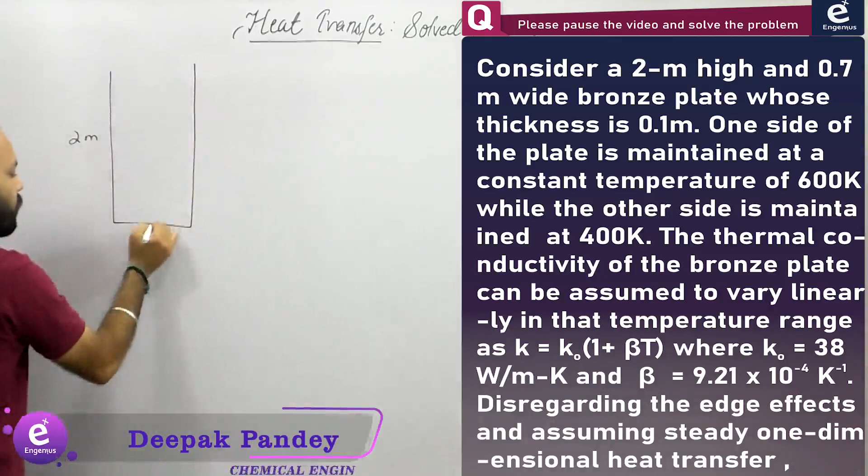पहला क्वेश्चन देखते हैं. The question says consider a 2 meter high and a 0.7 meter wide. So this is 2 meter high and 0.7 meter wide bronze plate whose thickness is 0.1 meter. Actually this width is not in this direction. ये width जो होगी ये इस direction में है, तो that becomes 0.7 meter. Okay, having a thickness of 0.1 meter.

One side of the plate is maintained at a constant temperature of 600 Kelvin. So you can take any side. Suppose this side is maintained at a constant temperature of 600 Kelvin, while the other side is maintained at 400 Kelvin.

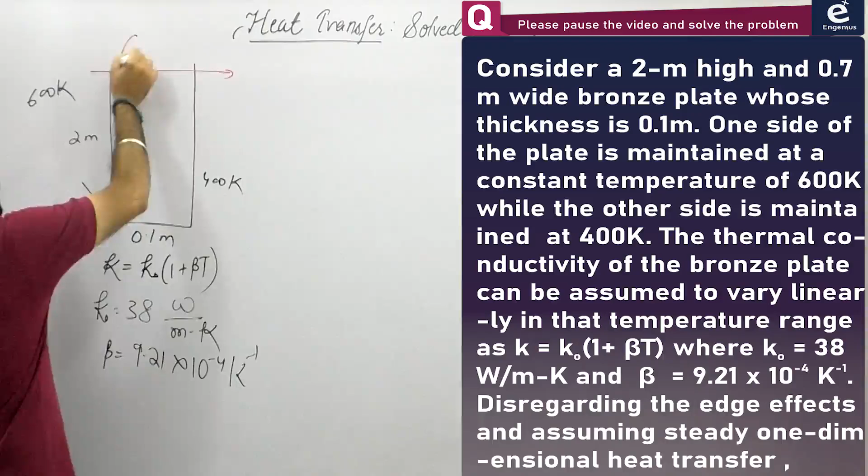Disregarding the edge effects and assuming steady state one dimensional heat transfer, determine the rate of heat conduction through the plate. So steady state है, one dimensional है. And please note that we have to find capital Q. Be very careful that in question आपको capital Q पता करना है या small q.

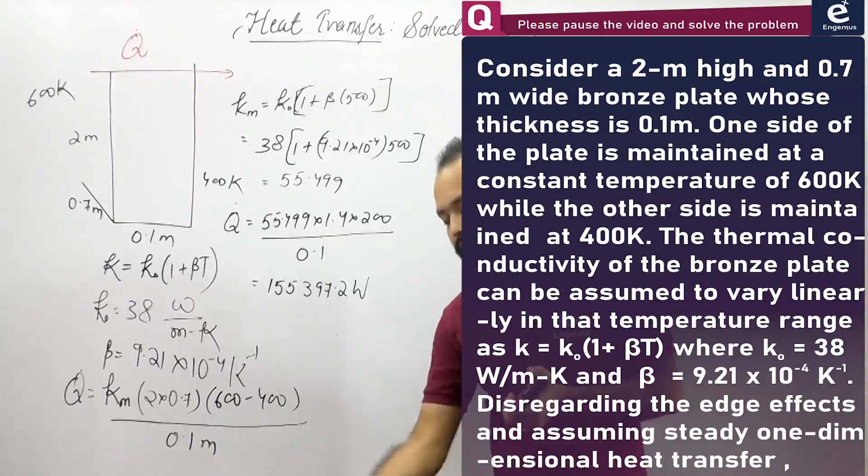In these kind of problems, I should be extra careful while solving these kind of problems, okay. So this was a simple numerical where k was thermal conductivity.

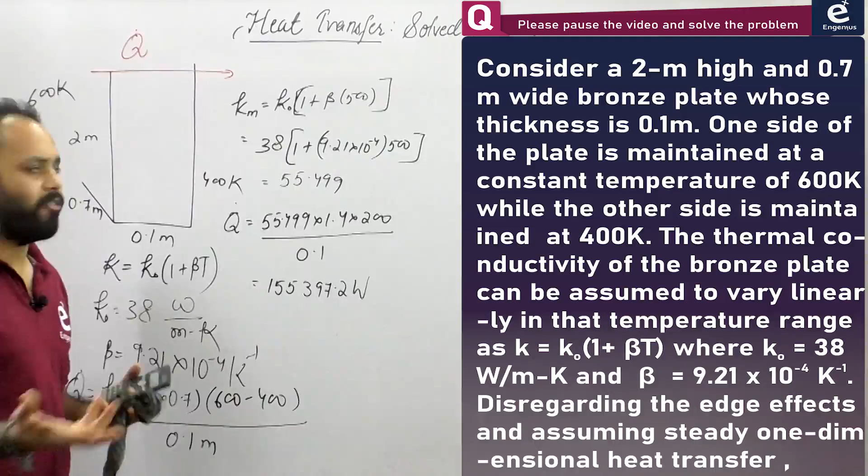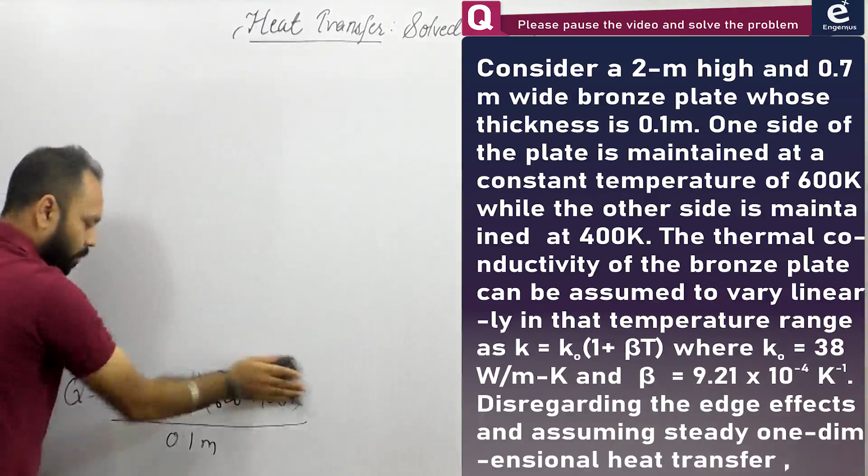Using 4 digits after the decimal during the calculation, fine. The final answer should be rounded off according to the statement of the problem.

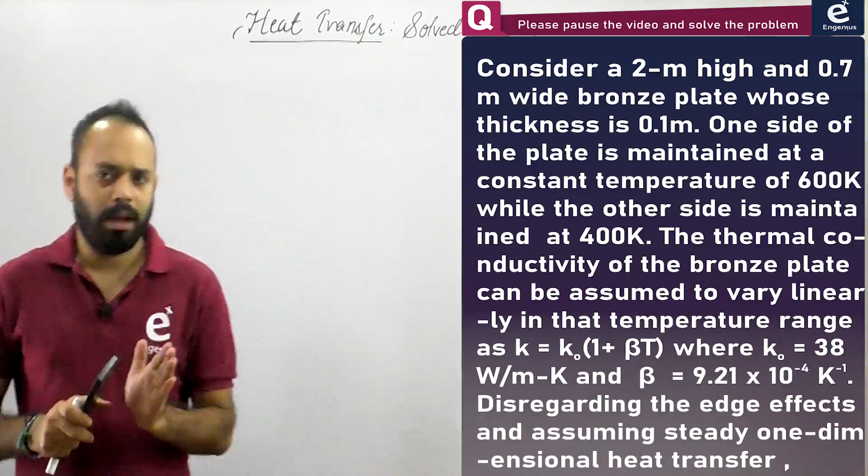So make a habit of using 4 digits after the decimal while doing your calculations, right? And the final answer should be rounded off according to the statement. Many times the statement says rounded off up to 2 decimal places, rounded off to nearest integer, rounded off to next higher integer.

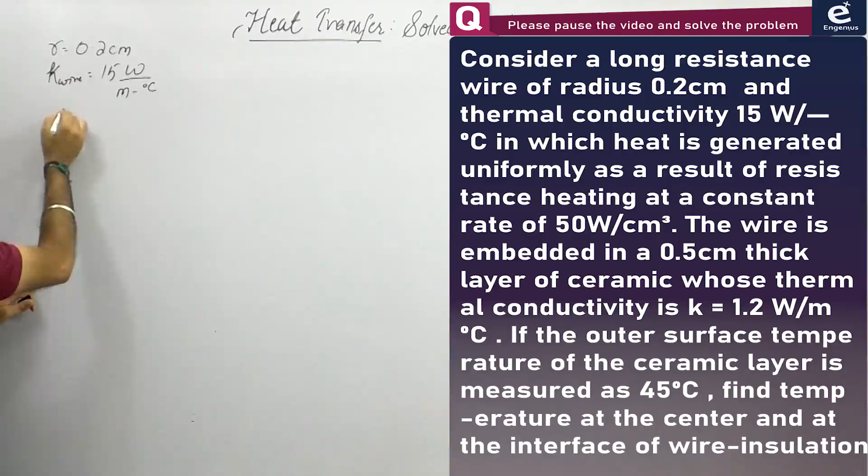There should be homogeneity in the units. Heat is generated uniformly as a result of resistance heating. I told you in current carrying conductors, heat is generated at a rate of, this is volumetric rate of heat generation. Different symbol has been used, but that won't make a difference. 50 watt per centimeter cube. Okay, the wire is embedded in a 0.5 centimeter thick layer. This is thickness, this is not the radius.

So this is the wire in which heat generation is taking place. This is the axis, suppose. The radius is 0.2 centimeter. After this wire, what is there? There is only insulation, there is cladding. Is heat generation happening in insulation? Of course not. In insulation there is no heat generation. Heat is only getting conducted in the insulation, correct?

The thickness is 0.5 centimeter, so the total radius becomes 0.7 centimeter. Ceramic layer, and the K of ceramic is 1.2 watt per meter per degree Celsius. Okay, the outer surface of this ceramic layer, this surface temperature is Ts, which is given as 45 degrees Celsius.

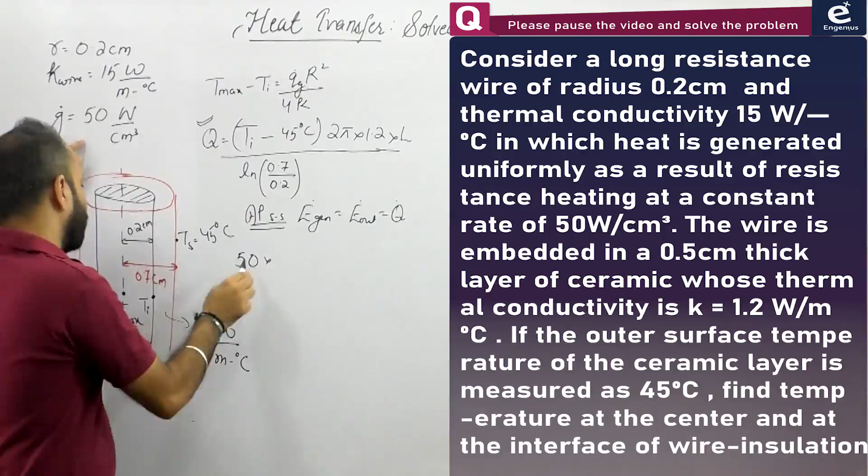What is heat generation? Don't say 50. 50 is the volumetric rate of heat generation. तो E generation क्या हो जाएगा? मैंने आपको कन्वर्ट करना सिखाया है. 50 watt per centimeter cube multiplied by pi. And what is R? R 0.7 लेंगे कि 0.2 लेंगे? It is 0.2 because जिस बॉडी में जनरेशन हो रही है उसका रेडियस केवल 0.2 है, 0.7 नहीं है. So 50 into pi into 0.2 square.

50 into pi r square into L. Are unit conversions required or not? This is watt per centimeter cube and this is L centimeter into 0.2 centimeter square. I don't think that unit conversions are required. So this will be 50. From here I can calculate the value of Ti. But what about the conversions? This L has to be in meter, because this 1.2 is in watt per meter per Kelvin. So this L is in meter.

If this L is in meter, even this L has to be in meters. अगर ऐसा नहीं करूंगा, then the units won't match, because later on when I equate these two things, this 50 into pi r square into L, I'll cancel out this L and this L. यहाँ यूनिट्स की कंफ्यूजन हो सकती है. आप बोलोगे कि सेंटीमीटर क्यूब, इट विल बी कैंसिल्ड. But in that case, if this L is in centimeter, I can't cancel out this L with this L because this 1.2 is in watt per meter per Kelvin, that is per meter per degree Celsius. So meter is there.

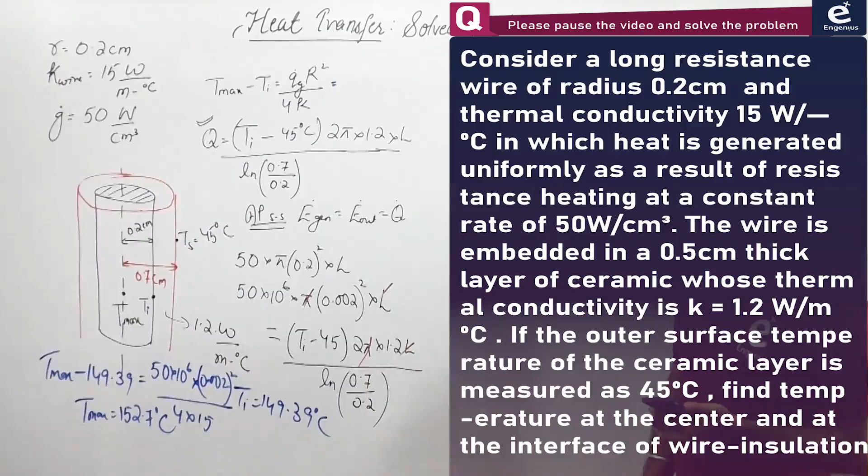The reason being that please understand that when generation is taking place, I can never write that Q is equal to driving force by resistance. So you can see that I have only written Q is equal to driving force by resistance only for this cladding, only for the insulation, not for the other portion. Also, you should understand that if Q is not given, don't say Q leaving from here, because Q here and Q here is not same. ये भी एक फंडा है यहाँ पे.

I told you that when generation is taking place, Q is a function of location. So Q here and Q here will be different. But Q here and thereafter Q everywhere will be same. ये fundamental है. अगर ये fundamental clear है तो आप generation plus conduction की problem में गलती नहीं करोगे. The problem can further be made complex by including convection, by including the medium here. So that was a very nice problem on conduction plus heat generation. I hope you were able to understand.

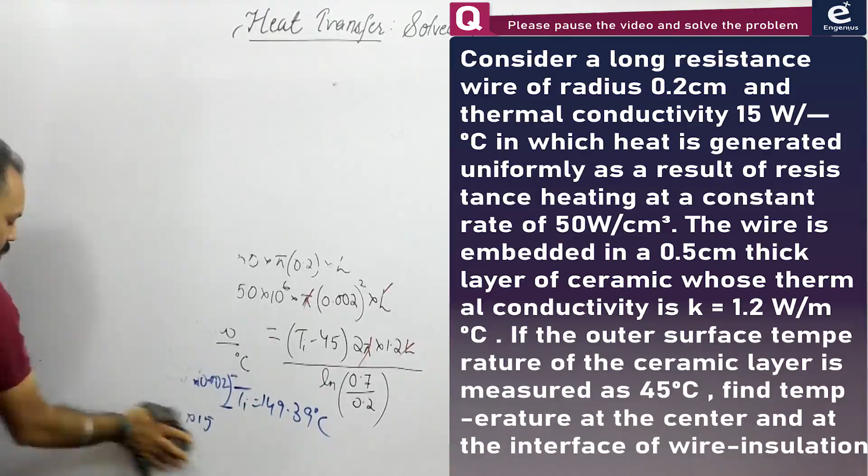Okay, let us take the next problem now. These two problems are not from GATE. I have also selected some problems from GATE, some nice problems, so that I can cover each and every detail. Whatever detail I have discussed in class, everything must be covered.

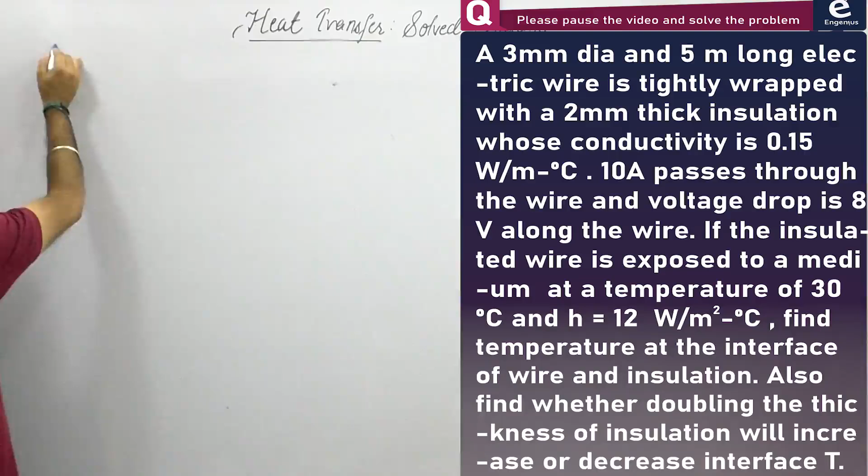Okay, so let us talk about the third problem. It says this was the resistance wire. A 3 millimeter diameter and 5 meter. See, this is diameter. So D is equal to 3 mm and length is equal to 5 meter. And 5 meter long resistance wire is tightly wrapped with a 2 millimeter thick plastic. Thickness is given to you.

Okay, so again there is a wire. What is the diameter of this wire? 3 mm means the radius will be 1.5 mm. So jab bhi aapko diameter aur radius ki baat lage, aap turant pehle confirm karke likh liya karo that it is radius or it is diameter, otherwise you will make mistake.

And 5 meter long is tightly wrapped with a 2 mm thick plastic cover. So 2 mm thick, so there is an insulation here. Okay, so let us make the insulation. What is the thickness of the insulation? Don't say radius, the thickness is given to you. It is 2 mm, right?

Electrical plastic, okay, 2 mm means this entire will be 3.5 mm. It is given that thermal conductivity of the insulation is 0.15. K of insulation is 0.15 watt per meter per degree Celsius. Theek hai? Electrical measurements indicate.

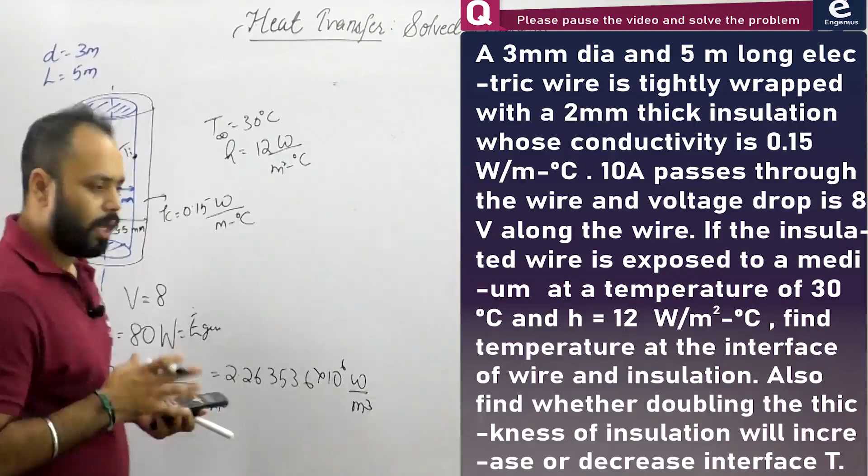So from the data of current and voltage, I calculated what is heat generated per unit volume and what is heat generated per unit time. Now the funda is that at steady state the heat conduction is equal. अब आप देखो, अब आपको यहाँ पे Tmax दिया है क्या? Even they are not asking you Tmax and they have not provided you Tmax. So why go into that equation that Tmax minus Ti is equal to Qg R square by 4k, है ना? Because Tmax ना तो पूछा है ना तो बताया.

In this case, they are asking Ti, right? So Ti, and this is your surface temperature. Let us call it Ts. Okay, let's see whether we can find the value without using the Tmax or not. Okay, so this is the 80 watt. 80 watt heat is being generated in the wire, and of course at steady state 80 watt will be leaving this. And if 80 watt is leaving, even in convection this 80 watt will be leaving. So can I say that everywhere this 80 watt will be leaving? So यहाँ के बाद in the insulation, in the medium, 80 watt will be the rate of heat transfer.

The units are fine, and therefore this must be equal to h, which is 12, multiplied by A. What is A? The surface area, which is 2 pi RL, or pi DL you can say. 2 pi RL लिख लेते हैं. 2 into pi into R, which will be 3.5 mm, so 3.5 into 10 power minus 3, into 5 meters. That is 2 pi RL multiplied by delta T. What is delta T? Ts minus 30. So from here you can determine Ts. Once you determine Ts, you know how to determine Ti, right? So let's do this calculation.

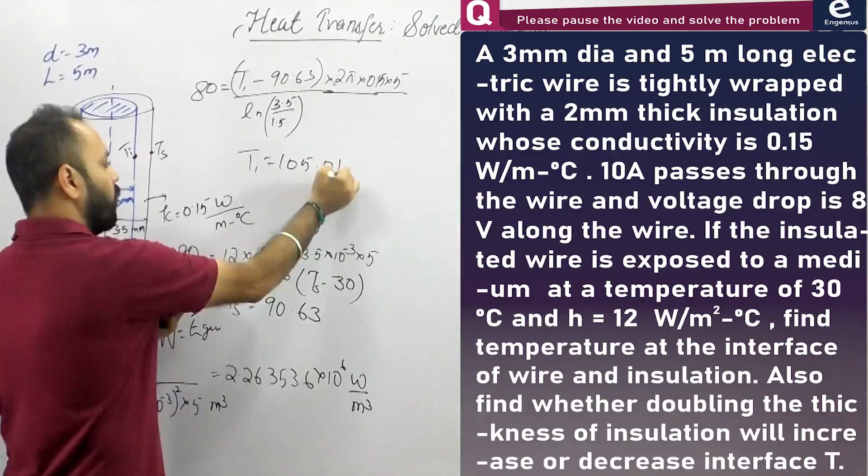So that 80 divided by this, मैं सभी को लेफ्ट हैंड साइड में ले रहा हूँ, और multiplied by log of this, find log of 3.5 divided by 1.5. Okay, this plus 90.63. The answer is 105. So Ti becomes 105. What was Ts? 90.63. So Ti is coming out to be 105.01 degrees Celsius. This is how you can do the calculation.

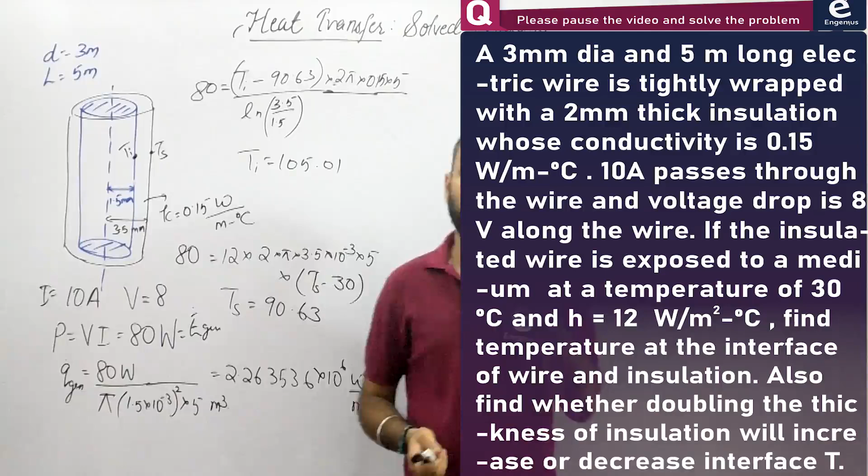Again, a very good problem on conduction plus convection. देखो, इससे पहले वाले क्वेश्चन में I tried to relate the cylinder where heat generation was taking place and the insulation. In this problem, I tried to relate the insulation and the medium. There can be a problem where T max is given and medium temperature is given, then they are asking things. Be very careful. Don't assume that Q at this position and this position will be same. Don't do this. These two problems will be a kind of eye opener for you.

Now the question says also determine whether doubling the thickness of the plastic cover will increase or decrease the interface temperature. इस thickness को बढ़ाने से आपका इंटरफेस का टेम्परेचर इंक्रीज होगा या डिक्रीज होगा.

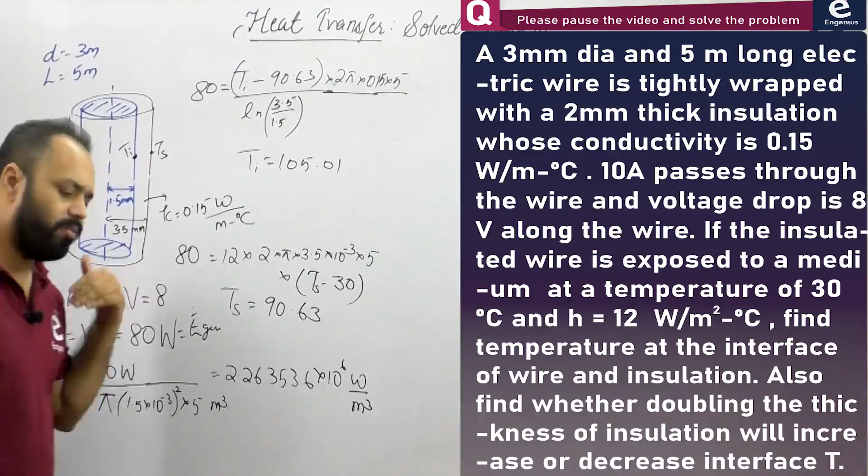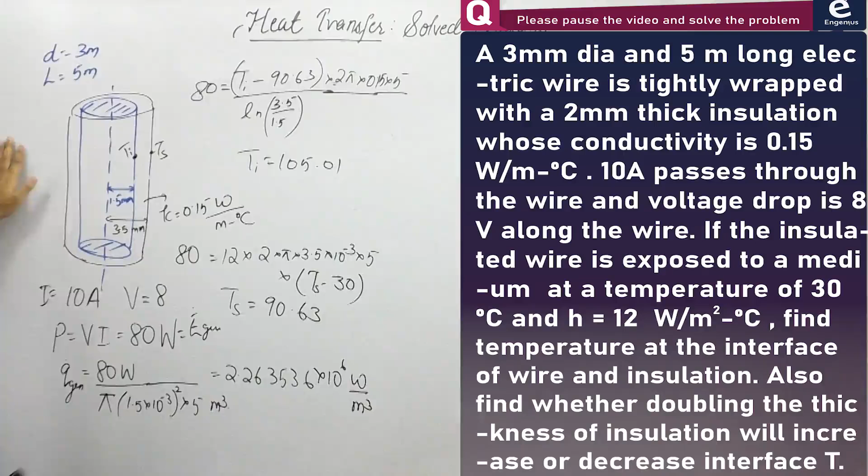Okay, we'll talk about that. So that was a very good problem again based on conduction plus heat generation, and we tried to include convection as well. So this was the third problem. Like this, I have selected a total of 14 problems in conduction. है ना? I have not selected those where you have to just put the values. In heat transfer, there are many problems where you have to just put the values in the results of Fourier

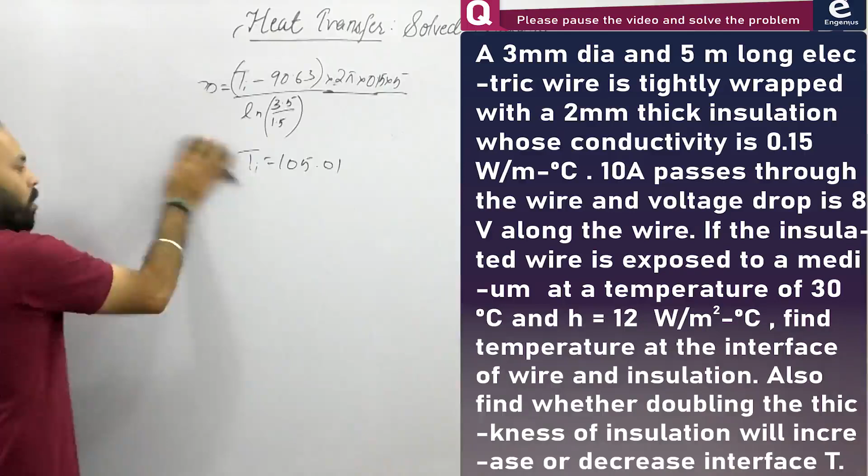Fourth problem. So the fourth problem says, read out this problem. It says the temperature of a gas stream is to be measured by a thermocouple whose junction can be approximated as a 1 millimeter diameter sphere. So diameter is equal to 1 millimeter. ठीक है, 1 millimeter dia. एंड ये स्फेयर है, ध्यान रहे. थर्मोकपल का जो बल्ब है दैट कैन बी अ स्फेरिकल बल्ब.

Whose junction, as a 1 millimeter diameter sphere, the properties of the junction are thermal conductivity K equal to 35 watt per meter per degree Celsius. Junction means the material K, and material density is also given. Rho is equal to 8500 kg per meter cube and specific heat is equal to 320 joule per kg per

degree Celsius. ठीक है? If the convection heat transfer coefficient between the junction and the gas H is equal to 210 watt per meter square per degree Celsius, determine how long it will take for the thermocouple to read 99% of the initial temperature difference. Okay, first of all, I'll come to that. Let us see the units.

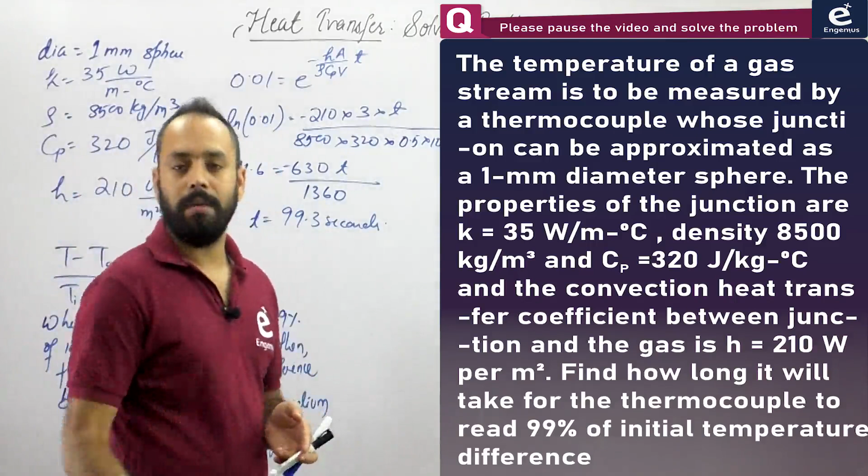So h into 0.5 into 10 to the power minus 3 by 3, divided by 35. It is coming out to be 1 into 10 raised to the power minus 3. So it is well within the limits of lumped heat capacity, and that is why I knew this was going to happen. If you want to verify whether your question falls under the limit of lumped heat capacity analysis or not, you can always calculate the value of Biot number.